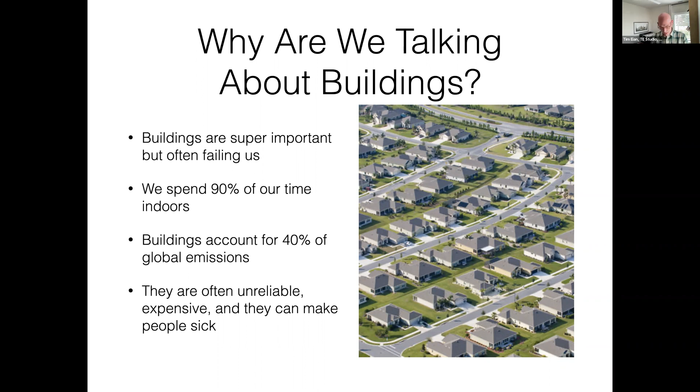So I'll lead in with, why are we even talking about buildings? A couple of points to note here: they're very important to us, but yet they're often failing us. We spend a lot of our time indoors. Buildings account for 40% of global emissions. And yet with the importance that they have and the footprint that they have, they're often unreliable, expensive, and they can even make people sick. So arguably, we haven't quite arrived with our codes and ordinances, and we can do better.

So let's for a moment just imagine the perfect building. It could be your home, your school, workplace, a place for entertainment. How would you describe it? It's a question that I ask clients, that I ask when I go out in public. And here are some of the highlights of what I typically hear.

In a cold climate like Minnesota, people definitely want to be warm in the winter inside of a building. But also with the climate shifting a little bit, they are more and more concerned with staying cool in the summer. Nobody likes drafty buildings. There's also noise associated with that. And more people are talking about wanting low energy bills and little to no fossil fuel use, so they don't want to be part of the problem, they want to be part of the solution.

Buildings should generally be affordable to build and operate. I want to stress that second part. Most of you, hopefully, will understand that building a building or buying a building, while a big expense, is really only part of a larger picture, and that buildings really cost over time, and that's something that we're concerned with as well. And a really good building should be healthy and free from smoke, soot, pollen, mold, and bugs.

Again, these things go without saying, perhaps, but in reality, we've all seen buildings that wouldn't really live up to those standards. Smoke has become a real issue in recent years here in the United States, so it's something to think about. And then coming from an extreme climate zone like Minnesota, we want to make sure that we have a good shelter that can perhaps weather the storm, do a few days without needing energy or infrastructure, and keep people safe. That's another big consideration, especially with the climate again shifting.

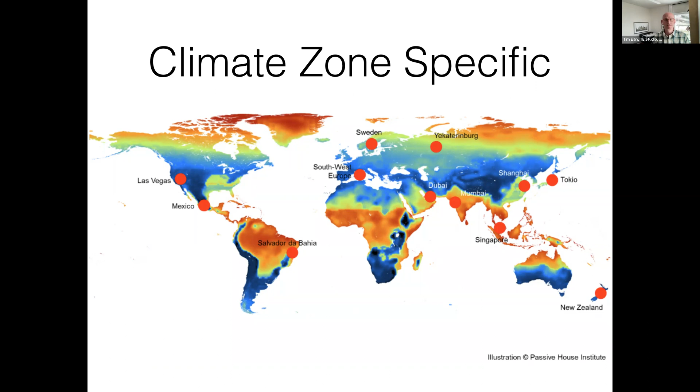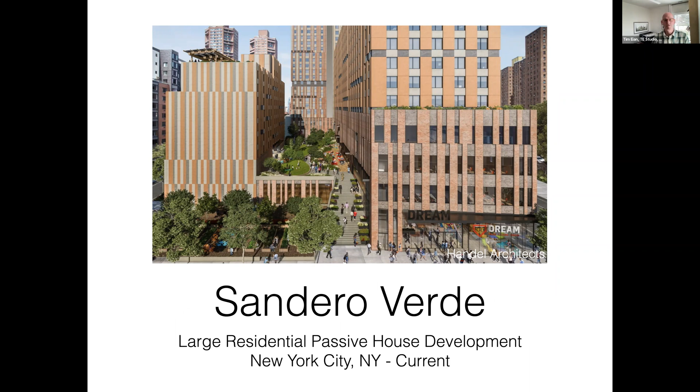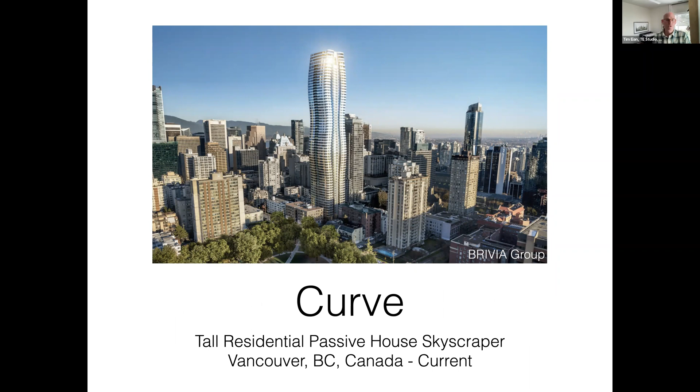This is just a healthcare center, a regional healthcare center in Spain, completely different climate zone, but again, I want to give you a little bit of the flavor. A large project currently ongoing here in the United States, Sandero Verde in New York City - 720 living units from memory and some mixed use components. So very large scale passive houses, also a possibility. And also currently ongoing, the tallest, designated as probably the tallest passive house in the world, the Curve Tower in Vancouver, British Columbia.

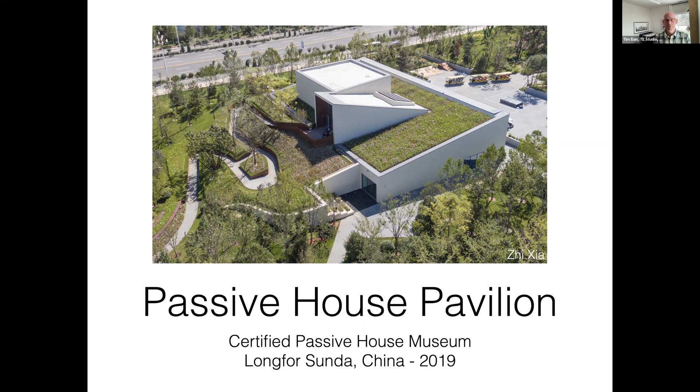Passive house is a third-party certified standard. We'll talk about standards a little bit today as well, so you get a bit of a comparison with other programs out there. You don't have to certify a passive house, but you can. And you can also get certified as a professional to practice in the passive house realm.

It's also a vetted tool for sustainable design, and that's a unique selling point for Passive House because there are tools that come with this program for architects, for engineers, for consultants that are very, very helpful to illustrate building performance as you're designing. And that's not something that can be said for all voluntary building standards. So this is actually a hands-on type thing, and one of the reasons why I personally gravitated towards it all those years ago.

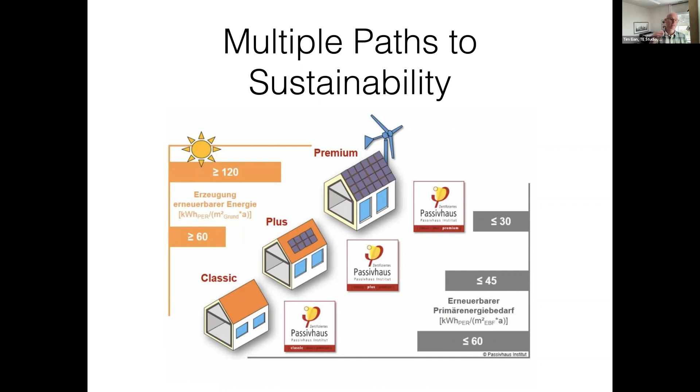There are, as I mentioned earlier, a few different pathways to achieving Passive House, and they happen at slightly different levels of performance. They also bank on varying levels of renewables. The main thing to note is you cannot renewable your way out of the Passive House standard, meaning you cannot make up for building shortcomings with PV panels or offsite renewables, but you can count them once you make a passive house, achieving a different tier of certification. It applies to all building types: residential, commercial, retrofits, and new construction. These tiers can then be applied to the varying building types.

Really, it revolves around one basic concept: energy conservation first. We get rid of wasteful energy use, everything that isn't necessary to provide the services we seek. We try to minimize as much as we can.

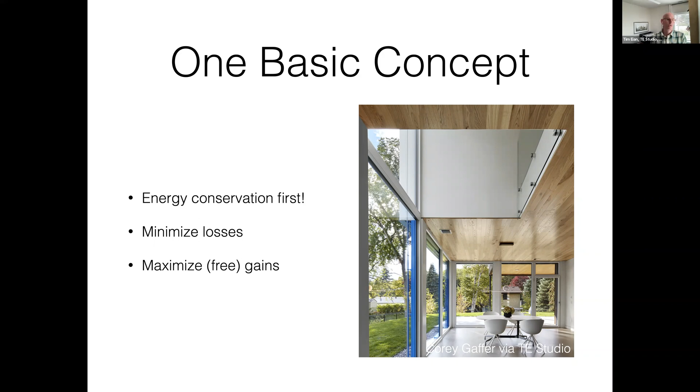By minimizing losses and then maximizing free gains. The picture I'm giving you here is one of my house, just to make a point. To the left in that image, you can see my solar facade. The glass there is harvesting free warmth in the Minnesota winter. The building is super insulated, airtight—we'll get into that in a minute—but we're also harvesting free energy available to heat it. So that's the lead in.

And then we combine that with what we call passive house windows. These are carefully selected and put together: high performance frame, good spacer, usually triple pane for a cold and extreme climate like ours. They will be airtight, allow solar heat gains when desirable to bring free heat in, and then lock it in with coatings. So they're just a little bit more special than your average window, and become an active part of the strategy. Think of the building as a thermal battery, and the passive house windows become the charger for that in the winter.

In the summer it's quite the opposite, and we look at shading them properly. We want an adequate ventilation strategy at the top.

A passive house will also be airtight. When you make an airtight enclosure, you need to worry about the quality of the indoor air. So we'll have active ventilation in all passive house buildings with a heat recovery ventilator. That ensures that in the winter the incoming air is pre-warmed with the stale outgoing air, and in the summer it's pre-cooled. Airtightness is important because leakage in buildings can account for a quarter, sometimes more, of all the energy transfer to the environment. That's something we don't want, so we want to shut that off.

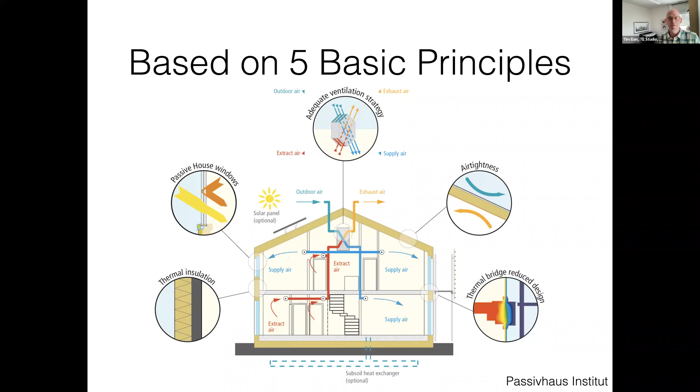Well, in the passive landscape, we're banking on energy retention and free heat gains. So we really maximize what the building envelope will do, and thereby we can really minimize what active componentry we have to put into a passive house. And that's really where it gets its name. It banks on passive mechanisms, and it's not so reliant on active mechanisms.

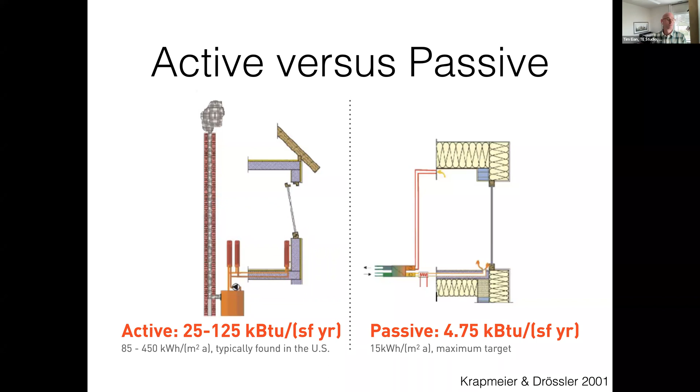I'm giving you some numbers down below. Generally, energy is tracked in some kind of energy number per square foot per year. In this case here, the kBTUs, and you can see we're order of magnitudes smaller when it comes to heating energy, and more on that in a minute.

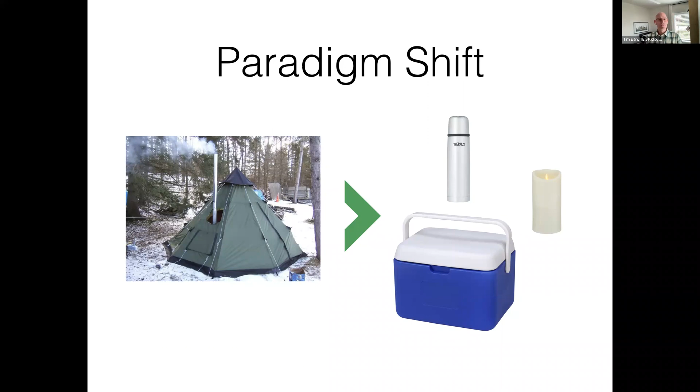So you can see code buildings consume mostly heating energy in Minnesota, a very significant component, and that in a passive house is massively shrunk. These pie charts are to scale. So overall, I find in a residential setting, to use that as an example, 50 to 75% less total energy use, with the heating energy component seeing the most drastic of reductions. In some cases, over 90% less heating energy is used when the building shell is built properly.

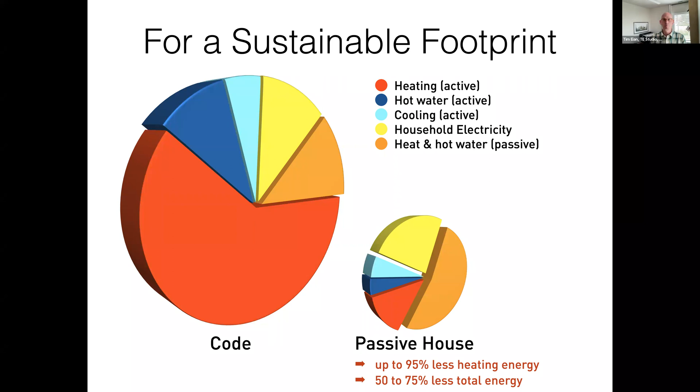And the way that this is tracked, again, is energy per square foot per year. So we establish a gas mileage for buildings, and that's both in our energy modeling and in the real world - you can measure these numbers. And there are some targets. There won't be a quiz here today. You don't have to memorize these, but some of you in the audience, this may be meaningful to you.

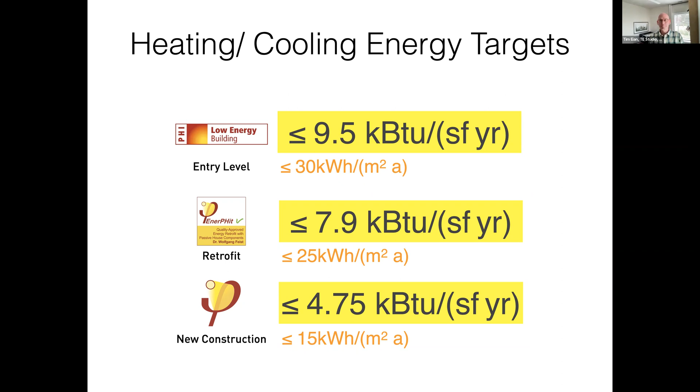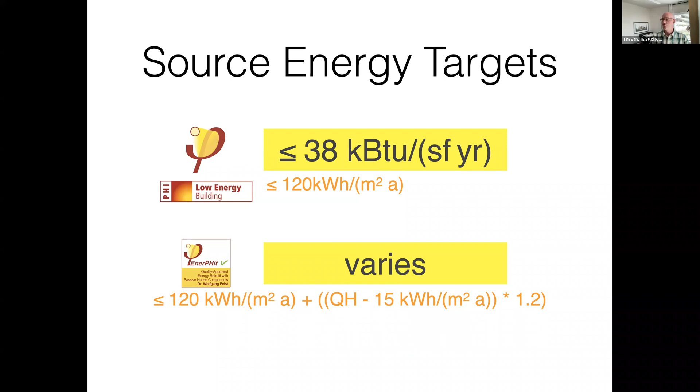So there's an entry level and on-ramp certification that, to be honest, is still a huge leap over code and therefore quite interesting. There's also source energy targets. Now, source energy is when you track the energy that a building consumes all the way back to where it is made, a power plant, for instance. And the reason why that's being tracked is because that's generally where the pollution happens, where the extraction of energy happens. So we got to make sure we keep a lid on that.

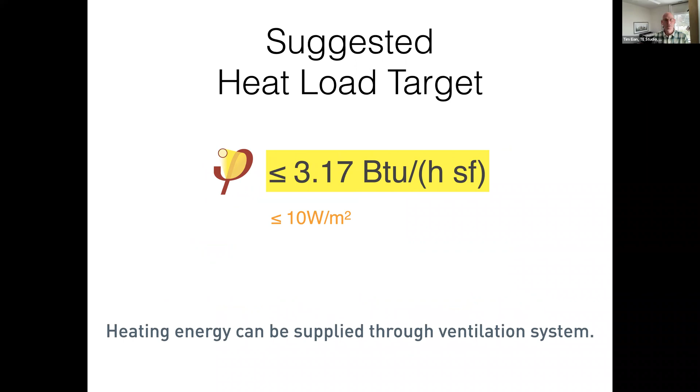Last but not least, here we have a suggested heat load target, and that is something that's difficult to do in Minnesota, but works quite well in more moderate climate zones. When you stay below the metrics here, you can actually heat and cool the building through the ventilation system alone and do away with active heating and cooling systems altogether, which is quite nice, but doesn't work in Minnesota with our current climate data.

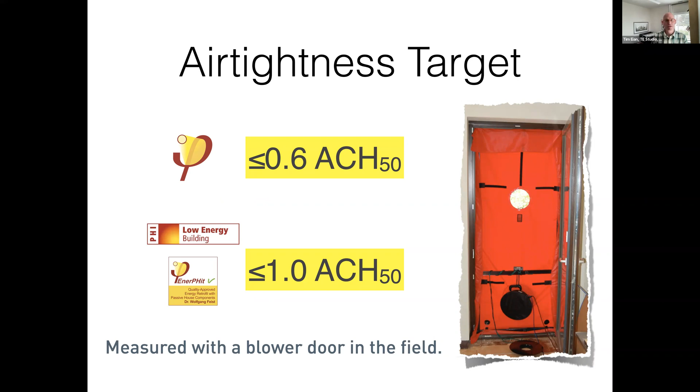Air tightness, I mentioned it before, is a key component here, is also being managed and tracked. 0.6 air changes at 50 pascals pressure is the target for new construction, and that has been readily achieved for the last 15 years or so since we've had passive house in the United States. Code, for comparison, is 3 air changes at 50 pascals for a residential building, so a passive house is 5 times tighter. And when you do retrofits, you do have some component targets.

Sometimes when you can't get the entire building to perform at a certain level, you can also upgrade individual components to specified levels and do it that way. And that can also be very attractive.

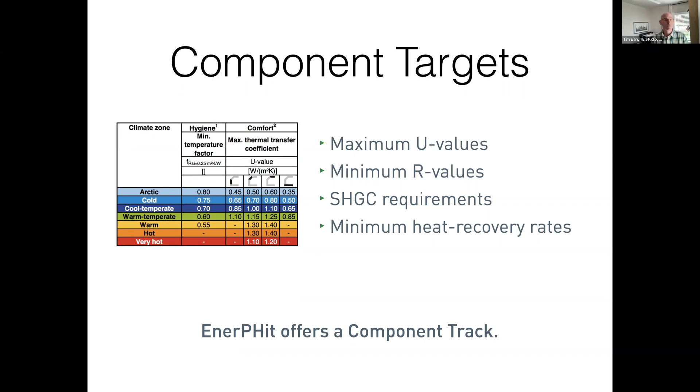All passive house buildings are energy modeled in a program called the PHPP, the Passive House Planning Package, which has been vetted the world over by different organizations, including ASHRAE, and found to be very accurate and helpful. This is the ultimate way to value engineer a building, because concurrently with design, the PHPP will tell you how your building is performing, and you can now be much smarter about selecting windows or glass or insulation.

Just a couple of bullet points here. Principles and metrics apply to all building types anywhere in the world. They're universal, just based on sheer building science. There's nobody who benefits or profits off the standard itself, so there's no agenda in the background. We're really just using pure metrics to deliver a sustainable carbon footprint and superior human comfort, well-being, and optimized life cycle cost. They're not arbitrary. They're based on these things that I told you we would like to achieve in buildings. And they're absolute targets with measurable results.

Passive House has been around since 1991, as I pointed out. So there's been many studies to validate the standard. It's a foundation for climate neutrality in the built environment, and therefore has been endorsed by the UN as the solution for the sustainable future of buildings.

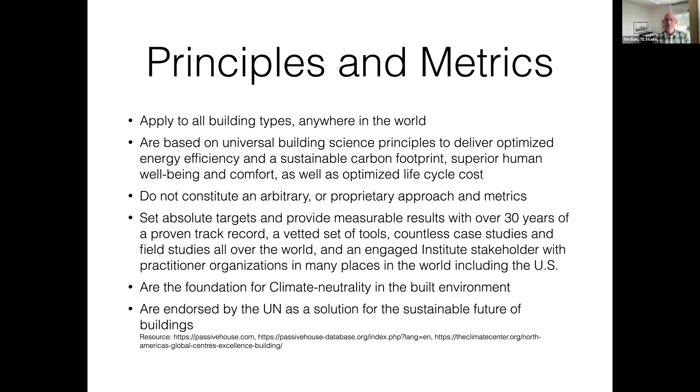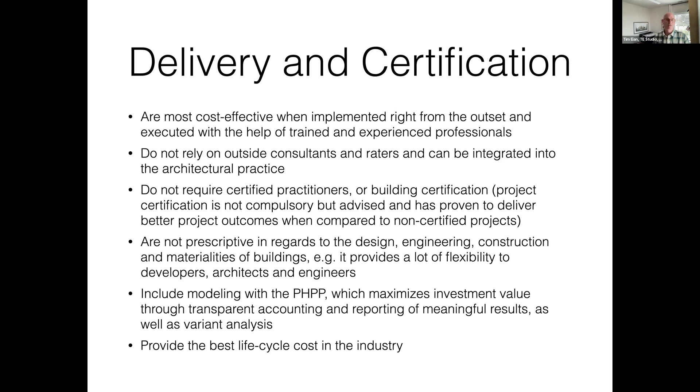I won't read out all of this here. I just want to give you an idea of delivery and certification. Passive houses are ideally delivered by a team of people who have a little bit of history and maybe some education with it. That'll be the most effective way. And while you don't have to certify a passive house and people doing one don't have to be certified, there's definitely some benefits to that. Maybe that's something we'll talk more about today.

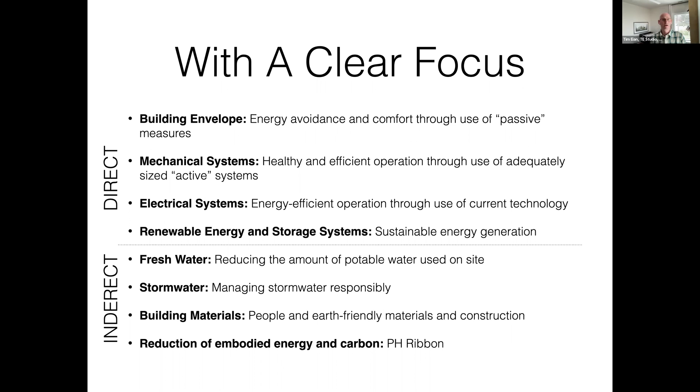Passive house has a very clear focus. It doesn't really compete with other programs like LEED, for instance. It focuses on energy and thereby directly affects your building envelope, mechanical systems, maybe electrical systems, and renewable energy systems. There are indirect components that are affected: water systems, stormwater, building materials, and embodied energy and carbon. This may be something where we go a little deeper later. I just want you to know it has a laser sharp focus on operational energy first and foremost, and other things are indirect benefits that come with it.

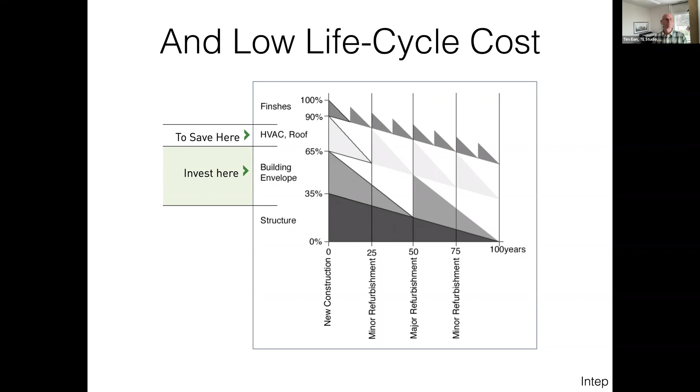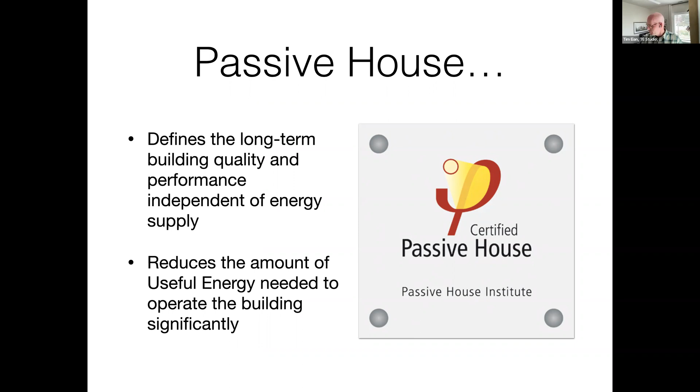What happens with the passive house is you're taking investment from a mechanical strategy and dumping it into the building envelope, and thereby every dollar you spend here will go twice or maybe 3 or 4 times the distance. So it is a smarter investment over time and pays you back. Passive house defines the long-term building quality and performance independent of energy supply. It reduces the amount of useful energy needed to own and operate a building significantly. That's sort of my first step here in bringing you what passive house is.

Let me show you some examples that are local to us. The Waldsee BioHaus, 2006, Bemidji, Minnesota, officially the first certified passive house in the United States, actually on the continent.

And then just a couple of years later, Passive House in the Woods, a project we did in Wisconsin, became the first certified passive house on the other side of the border.

Minifit House, one of the first cold climate retrofits to passive house standard in the world, was a pilot project in 2012. A project that started out as certified passive house became a PHIUS certified multifamily affordable housing project here in Minneapolis, Hook and Ladder, from 2016.

And a project that again started out as a passive house retrofit, in this case for public housing, Elliot Twins, later got done a little differently, but these are some of the landmarks that we have.

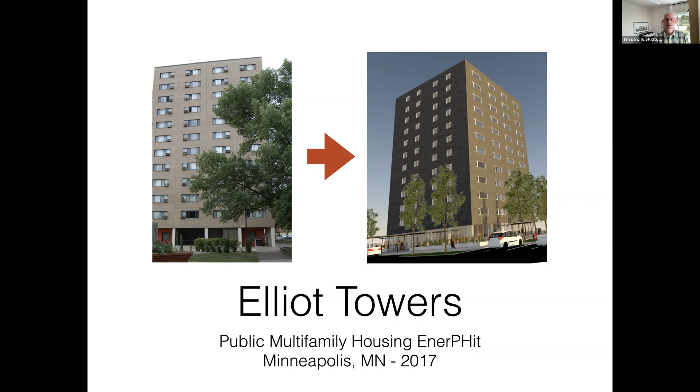So let me get into why passive house targets. Well, to understand that, I'll give you this chart. When you're inside of a building, you're looking at the right-hand column here. You're experiencing what we would call useful energy, things to satisfy our needs: hot water, heat, fresh air, light.

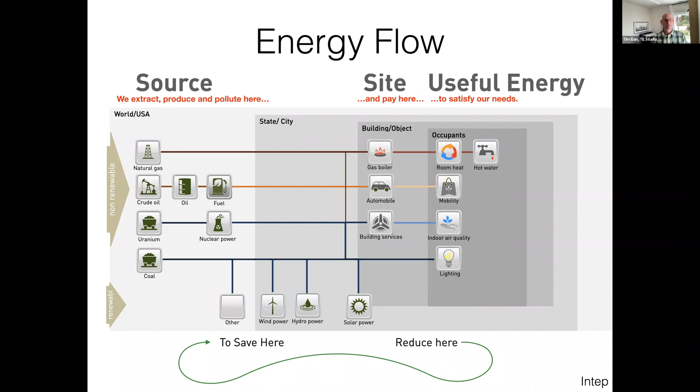Well, to get to that, you pay at the meter, which is in the middle, but it's really made on the left-hand side, what we call source energy. So that's where extraction, production, pollution happens. So every bit of energy that you can save on the right-hand side, you also save lots of energy on the left-hand side. And that's mostly because there's loss factors and other things. So there's kind of a thing spinning up. When you save on the right, you save even more on the left.

Right now, we average about 20 tons of CO2 per capita per year. And to get to where climate scientists tell us we need to be, we really need to bring that down to 1. So that gives you an order of magnitude here of what we're facing.

So when you bring that back to a residential home, for instance, and the energy that is used there, we have sort of two ways that we can do it. We can either try to substitute the footprint that a building has with all clean energy here on the left, so we have to make a significant amount of clean energy, much more than we're making today. And then the other option we have is we simply come up with efficiency and sufficiency measures so that we don't need that much energy anymore.

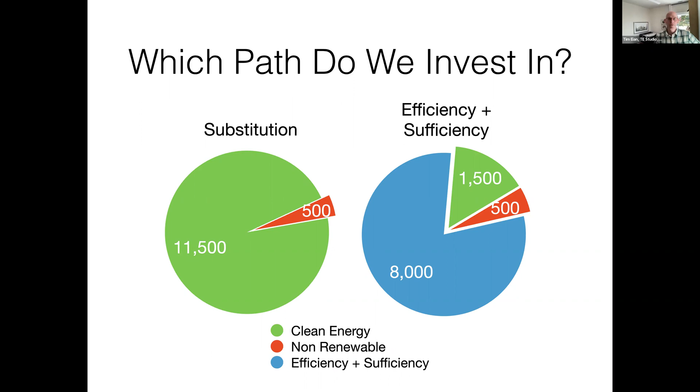And you can see we have a much better shot at using a green grid wisely and making that go the distance. So in Minnesota today, again, we have these aspirations. We have a standard that was introduced here for 100% clean electricity by mid-century.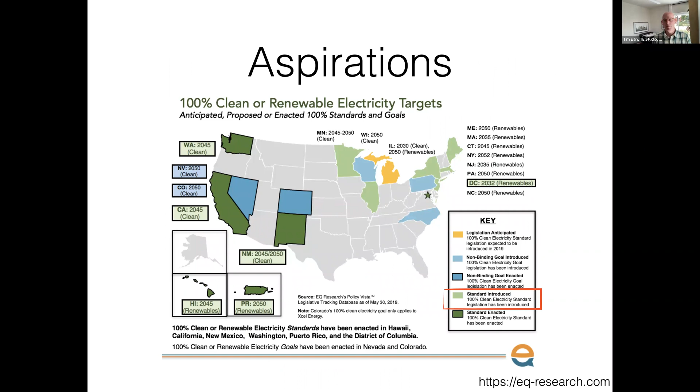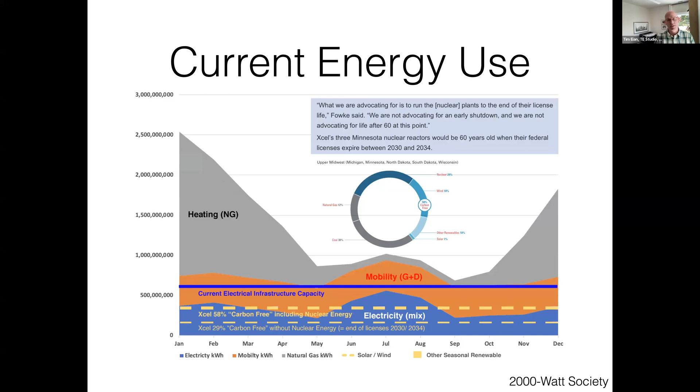When you look at, this is a graph for Minneapolis, how all energy in Minneapolis is used. When you look at the gray mountain in the background, you can see we use mostly heating energy, much more than we do for driving and lighting and other things like that. And that's really the mountain we need to conquer. So our clean energy plan of business as usual plus electrify everything leaves us with a very, very significant hill.

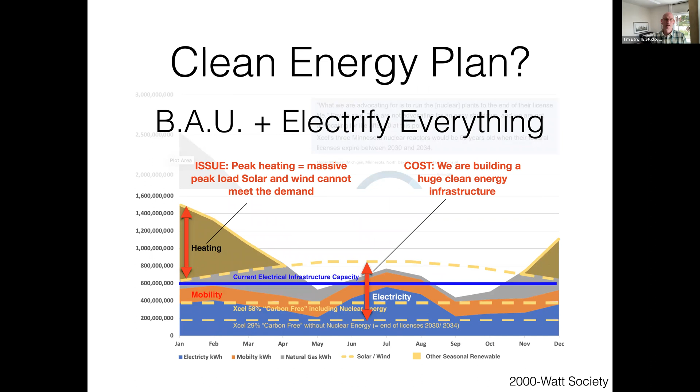So I call that we have a hill and valley problem. We can't make renewables in the winter very well, and so we don't know how to get on top of that. So again, we need to be a little smarter and come up with a carbon framework plan that leverages efficiency plus sufficiency and then modulates the renewables.

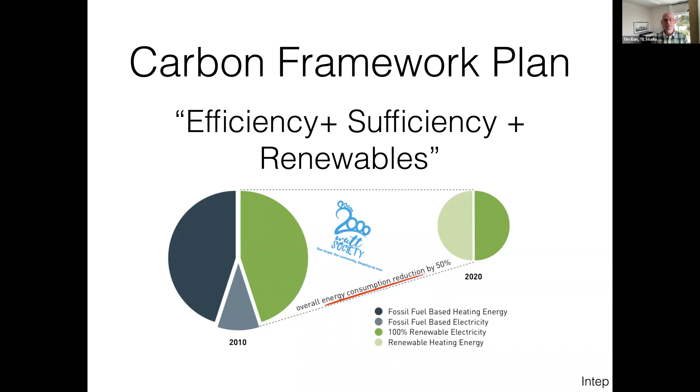Here's a study that we did for the city of Vancouver that shows how that's done. You reduce the energy footprint first, and then you come up with fossil-free energy production to get on top of it. And then Vancouver decided for buildings, they're going to turn this into a multi-step program, a 5-step program from now until 2032. And this program is currently active.

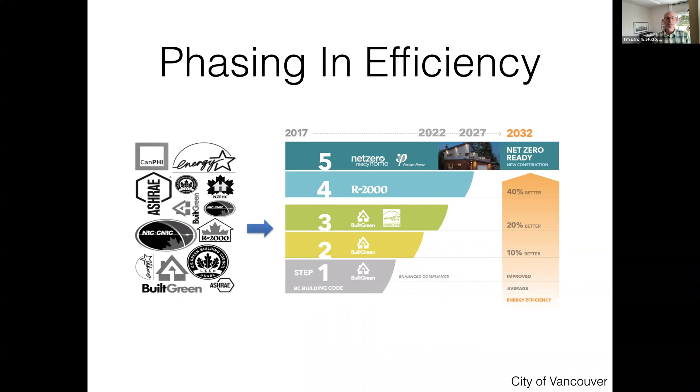And the way that they're telling building designers to do it is with Passive House. This is officially from the city of Vancouver's website, and you can see that spelled out right there.

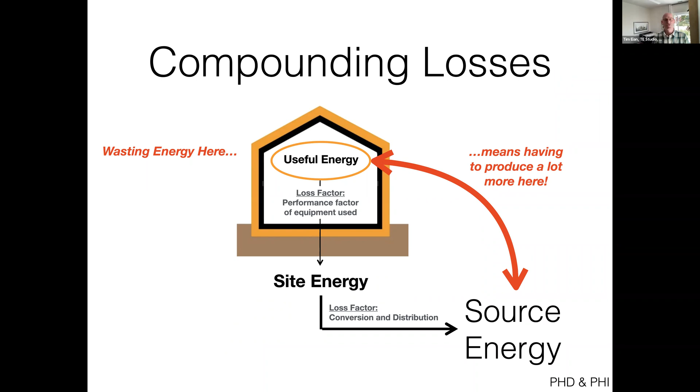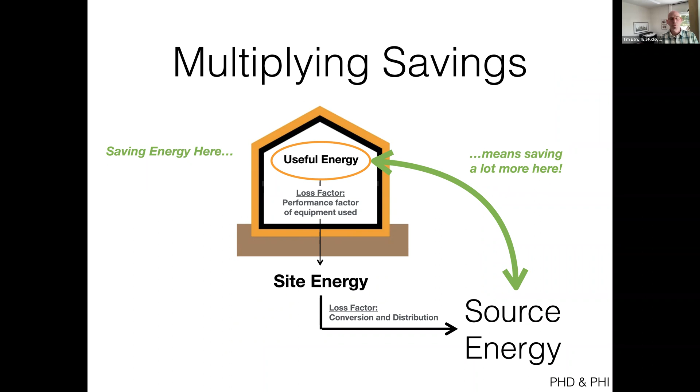And again, the reason why we do it: useful energy has a loss factor to source energy where the pollution happens. So wasting energy inside of the building means we have a lot more source energy we need to make. It's compounding. On the flip side, if we build a passive house and we're very mindful and use energy sparingly in the building, saving energy here really spins up multiplied savings on the source energy side.

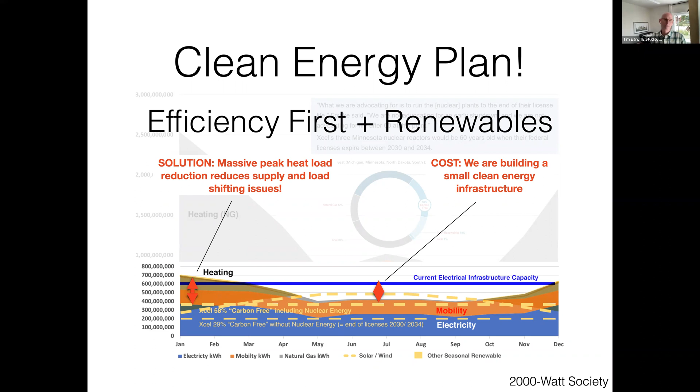And mapping that out for the city of Minneapolis, you can see if we retrofit buildings to passive house and build new to passive house - remember that mountain in the background, I kept it in here - it's gone. We can reduce it so much that we can almost meet the entire demand with our current electric infrastructure. So a passive house strategy works and can help us meet our carbon goals and climate goals and green grid goals that we currently have.

RMI found the same thing. They came out with an outline here called decarbonizing homes, and the term that they coined is beneficial electrification. I won't have time to get into the details with that, but you can do a deeper dive there and see why what I'm telling you today can be done with passive house.

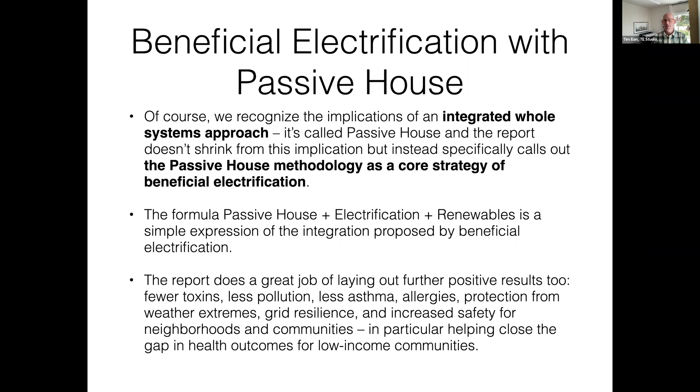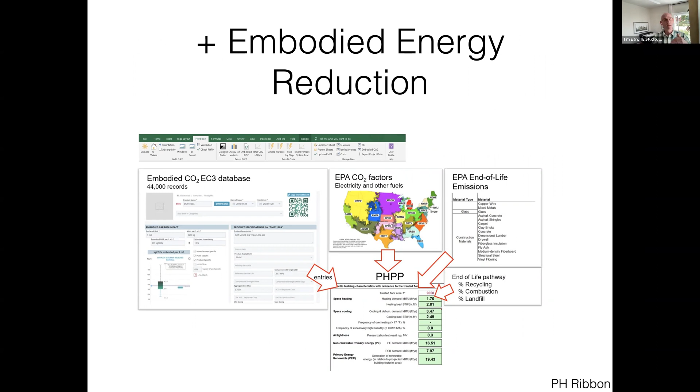And then, by the way, we can also reduce embodied energy. One of the benefits of the passive house planning package energy model is that it also offers a thing called the PH Ribbon, which is a carbon counter. So you can see what building materials you're using and how they're affecting that, and you can be smart about doing this in a way that doesn't additionally burden us with climate footprint.

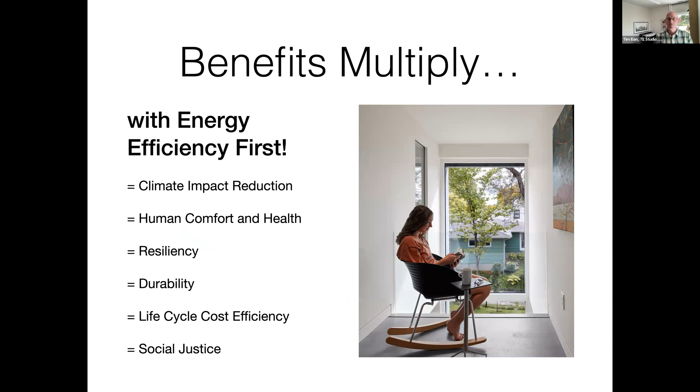So in sum, efficiency first, paired with renewables, is really the foundation for meaningful climate action. And in a passive house, we multiply these benefits of that strategy with human comfort, resiliency, durability, life cycle cost efficiency. And there's also a social justice component, again a piece that we could do a whole other talk about, but that's the benefit of passive house. So it transforms the status quo.

All right, I'll leap into a couple more things here. For those who are in the building sector, I want to give you just a quick idea of how it compares and fits in with other programs. Generally, it plays very nicely with what we have.

With code, we exceed all the minimums with a passive house, so there's really no competition - we just make buildings much, much better. And actually, passive house has become code in some jurisdictions around the globe, not in Minnesota at the moment, but in other places. When we look at ASHRAE, they're intrigued by passive house and actually currently have a working group that's looking to perhaps create their own or adopt the passive building standards that are in the market. So they're also looking at it.

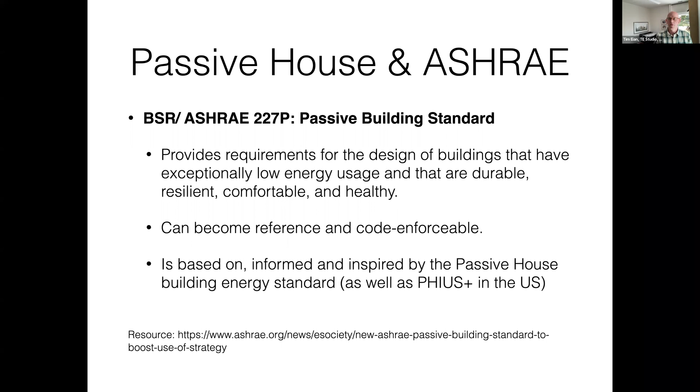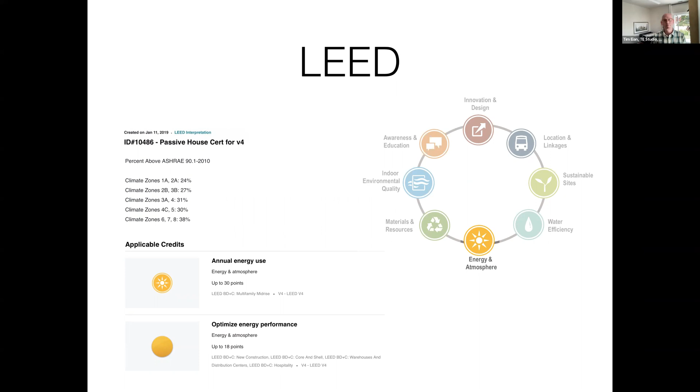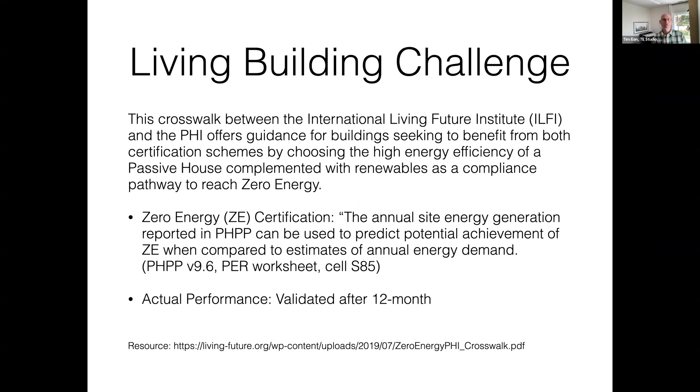LEED has a program that recognizes passive house for full points in the energy component. So if you do a passive house, you qualify for full credits for energy. The Living Building Challenge has also a crosswalk - here for their zero energy certification, you can use the passive house certificate, so that plugs in readily.

Enterprise Green Communities in Minnesota gives you extra points, and it looks like that may be spelled out even more explicitly going forward. Minneapolis came out with a sustainable homes policy in 2020, $5 million, up to 20% of cost or $90,000 per unit for affordable housing units built to the passive house standard.

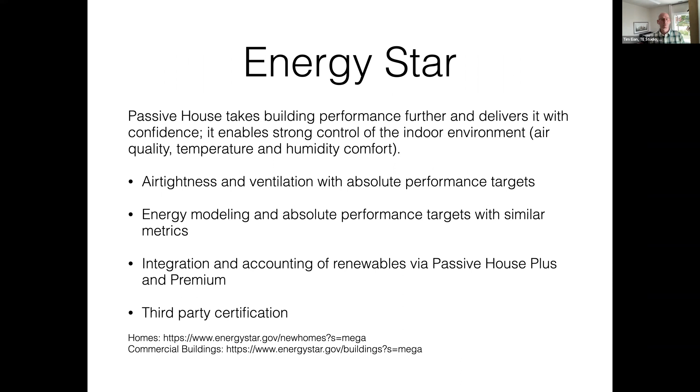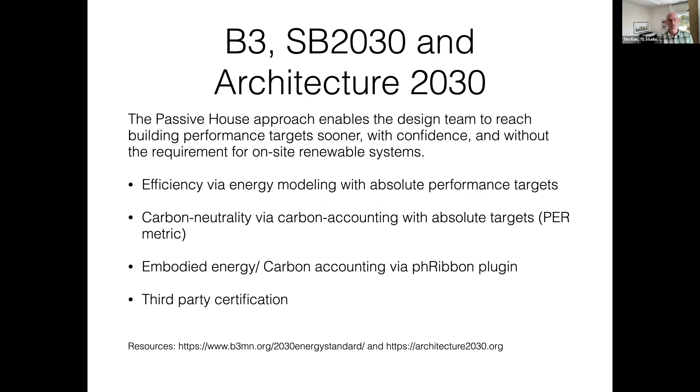Energy Star, again, there's no competition here. You're meeting the spirit of a program like that quicker, and you're just doing much, much better. And the local program, B3, SB 2030, and Architecture 2030, that's very similar, is very encouraging of it. And again, if you take a passive house, you can readily plug that into those programs and meet their targets. We could talk more about that.

The CSBR here at the U of M has endorsed the program. Architecture 2030 spells it out just shy of naming passive house, but when they talk about their goals, they say energy efficient design strategy, proper orientation, daylighting, passive heating and cooling. So, I mean, you can put two and two together—what they're describing there is a passive house.

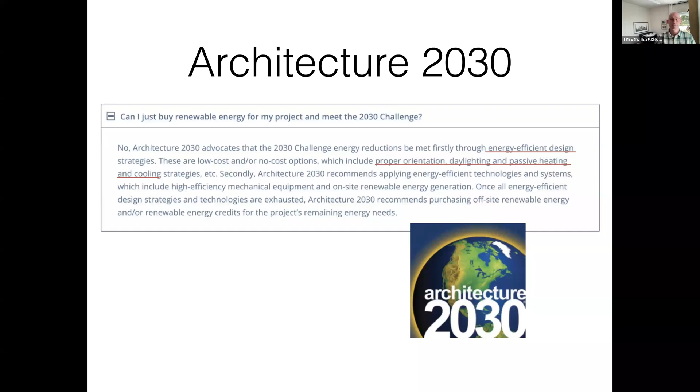So the key findings, just a couple more things here in the minutes that I have that I can give you as a practitioner here in Minnesota. When we go for passive house, the differences in construction and systems are manageable. They require some diligence, and it's good if you have somebody on your team who has experience, particularly for the design and energy model. That's a good idea. But it can be done even with people who are still learning on the job.

It costs differently on day one due to the investment in sustainability, and it costs differently over time as well. So most of you will ask yourself, well, how much more does this cost? It's the number one question I always get. And the answer to that is it doesn't really cost more, it costs differently. You invest like you would in a solar panel in a better shell, and that shell pays you back for the life of the building. So ultimately, it's the cheapest building you can own and operate.

But on day one, we see cost anywhere from 0 to 10, maybe 12% more. And this has a lot to do with who does it—is it the first time doing it, and other things like that. But we've also seen in some markets that between comparable projects, it doesn't cost more at all, that sometimes the market differences of who does a project are actually greater than making a building a passive house. So take all this with a grain of salt.

The life cycle costs are cheaper. We don't have time to give you case studies today, but we've conducted a bunch of them. And so that's even before anybody puts a cost or value on human benefits like comfort or health or anything like that. The energy performance is entirely different, as I showed you. Heating is no longer a major consumer of energy, and so we can focus on other consumers of energy. And also, because heating is not really a challenge anymore, we don't have to worry about it.

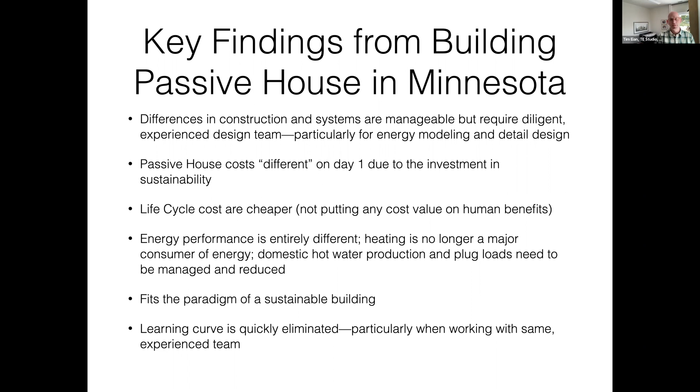So if the power goes out in the dead of winter, fine—the building isn't going to freeze, nobody's going to die. So it gives us that resilience. Thereby, I would say passive house fits the paradigm of sustainable building that we're all talking about. And maybe last but not least, the learning curve that so many perceive in the market is so quickly eliminated. Having done this now for 15 years here with regularity, once you get your feet under you, it's really not as big of a deal as many people think from the outset.

All right, so I got 4 more minutes to the comments here. I want to leave you with a couple of things that you can do, because that's also a question I often get, and I want to leave people encouraged and going out there, telling others about what they learned.

So the first thing is actively think about and consider passive house. You've now heard about it, you've learned a little bit about it, look it up, do a deeper dive. And when you come across a project, when you talk to stakeholders, no matter what your role in it, float that term, see if people have heard about it or if they're open to considering it.

Renovate your own house or other buildings and build to Passive House standard. This really solves a lot of problems for us individually, financially, and on a global scale. So look at it that way.

And for those of you who are in decision-making positions, require it. Simply ask your teams to deliver Passive House projects for public buildings or private developments, it doesn't really matter. Many places around the world do already, and that list is only ever growing. And then for yourself, consider getting Passive House trained or certified.

I'm also here today as a representative of the Passive House Network, which is our North American organization. You can get certified, your building can get certified, and materials, products, and components that you make can also get certified under this program.

Here's just a few resources I can leave you with today. We have our stakeholder organization, the Passive House Institute, who is the curator of the standard. But again, there's really no monetary gain here. This is not a for-profit endeavor, it's more of an educational setting where this is coming from.